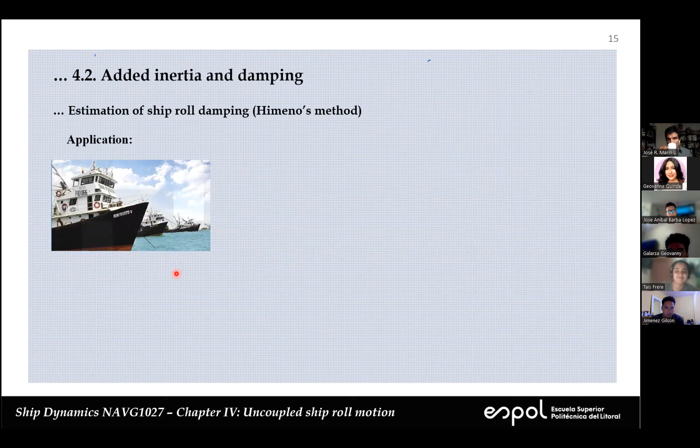So this is the ship. Can you read the name, Miss Frere? Don Fausto 5. So these are the lines of the ship. It's a ship that captures sardine, and we had this model from 2 or 3 years before. We were trying to analyze the possibility of installing a bow bulb. We were not successful; we didn't get any specific improvement. But anyway, we had this model, so this is the one that we used.

As you can see here, it has 2 chines. You see that the keel is not horizontal, typical of a fishing vessel. This is a big space for the propeller. These are the main characteristics. The model was 2 meters long. Some years ago, we decided that our model should be at least 2 meters long. If you have a smaller model, there are some strange influences, and it's difficult to do any analysis.

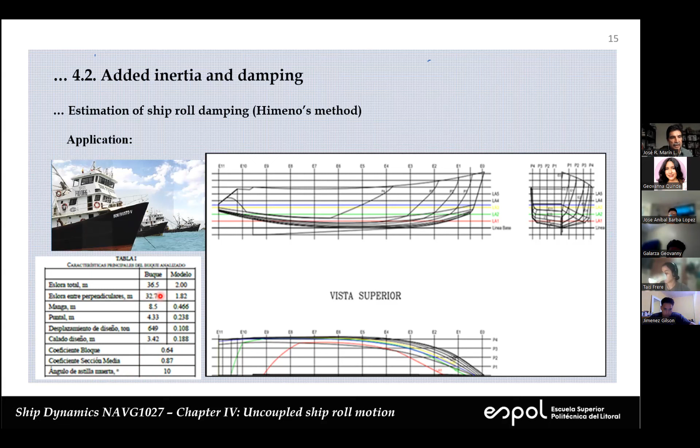And you see that the block coefficient, sectional coefficient, and deadrise angle are the same, because those are basically non-dimensional by nature. All the others we extrapolate. So that was our model. And then first, no velocity. So we employed a pool in the aquaculture area.

So they allow us to do this test. So we placed our model, 2 meters long, like this, and we make it oscillate, and we record the oscillation. And with the decrement, we were able to calculate many parameters.

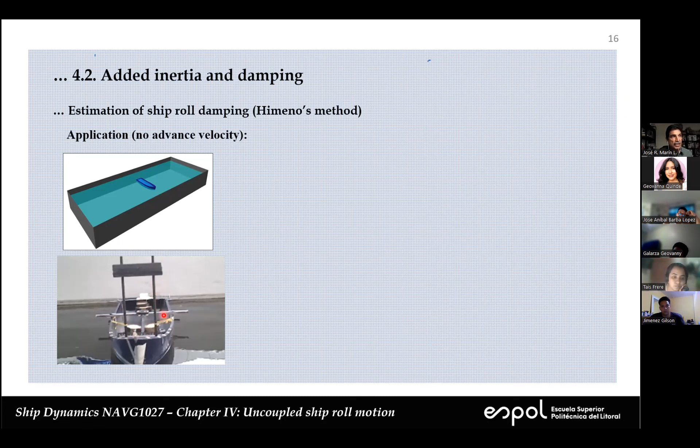We use this device that maybe you recognize from the lab. So putting this up and down, we could change the GM, and changing the GM changes the frequency of oscillation. So we could do tests changing the frequency of oscillation, and we could see the influence of that parameter on the damping coefficient. And you see here there is a small weight because before the test, we did some inclining experiment to determine the GM. So we could change the weight, we could change the GM for every test.

These are the conditions that we analyzed. We did returning to port, departing from port, and the loaded condition. This is the mean draft. In this case, we have the larger displacement, and the idea was to increase. You see from here to there, an increase of 2 centimeters in mean draft. And here this is the range of application of the formulation. Let me go back just a second, please.

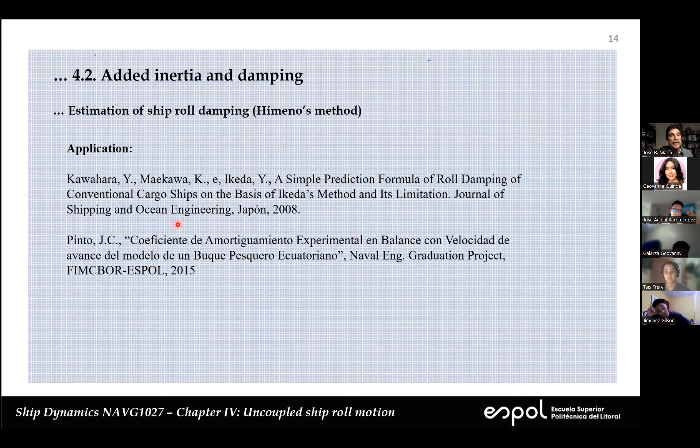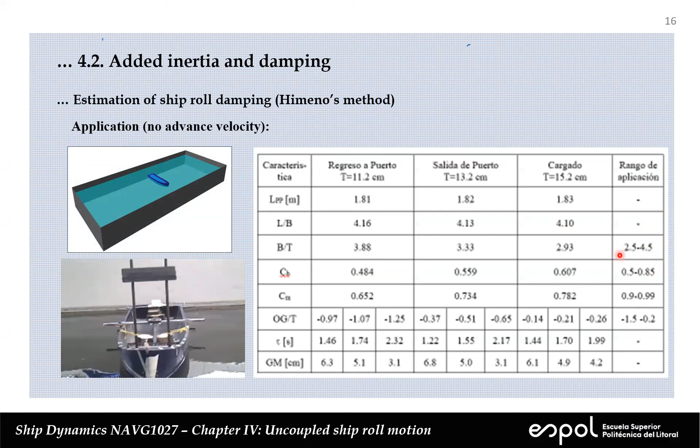We were trying to apply this formulation for conventional cargo ships to a fishing vessel. So the problem was that we knew that we couldn't do it directly, so we have to be careful. We noticed that this is the range of application. So at least for B over T, we are fine. This condition, CB, is the applicable region. And here, in the three conditions, it's not applicable.

Right? Because usually cargo ships have no dead rise, right? So it's basically a rectangle. In the case of the fishing vessel, we have a dead rise angle, and that reduces the sectional coefficient. So in this case, the third condition gets to 0.8 basically. So it's the closest to the range of application of this formulation.

And then, as we said, with this device, we changed the position of the centroid. So we use 3 positions of the centroid for each loading condition. And from that point, we could do the tests and, through the logarithmic decrement, calculate the damping coefficient. Down here, you see the GM corresponding to these 3 conditions.

Remember the minimum GM value for a general ship? Professor Zambrano, do you remember the minimum GM value for a general ship? 0.2. No. Manrique, do you remember the common value that we have to have in our memory for the GM? I'm not sure, but I think it's 0.15. Yes, that's the value. So in this case, in none of them, this is centimeters, so this is 0.06. So all of these are below the minimum required. But anyway, we were able to complete the tests.

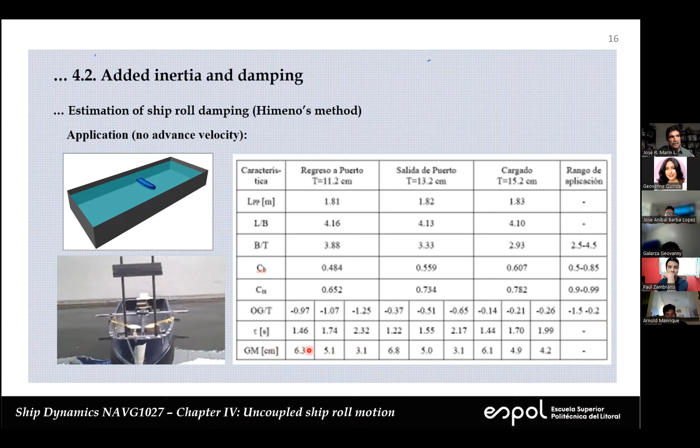The idea here was that we wanted to change the frequency of oscillation. So in this test, since the water was very calm at the beginning, we could control no water coming inside the model, right? So we started with a very large value of roll. So the oscillation was nonlinear. So we were able to measure how this coefficient changes with the amplitude of the oscillation. And this is what you're going to see here.

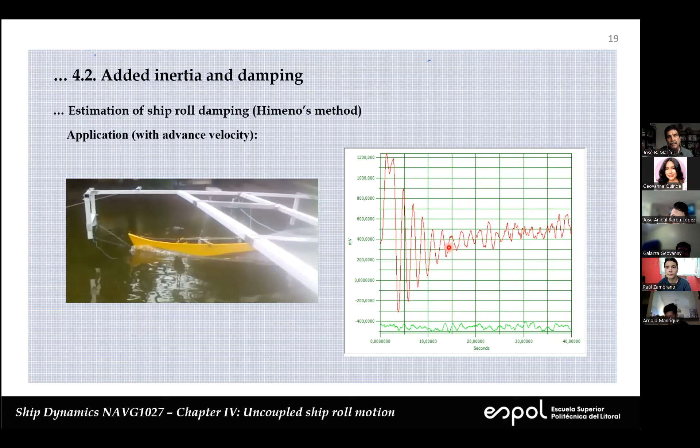Okay, and here we have the results. In this case, we were in the middle of the lake, so we were not feeling safe about the model. So that's why we wanted to include only a small initial amplitude and let it oscillate. Because with the motion, some waves are generated, and we had some problems with water coming into the model. So we just started with a small motion, and that's why we only calculated B1. So that's assuming that the damping was constant, okay? And again, we were able to calculate the virtual radius with respect to the beam, okay?

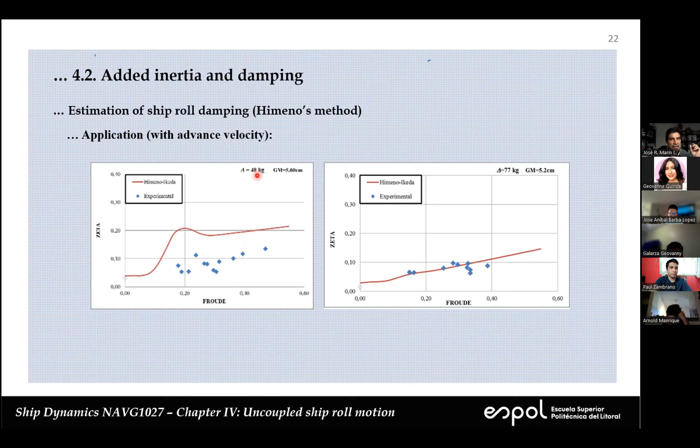Here we have the results. This is zeta. Remember the zeta coefficient, non-dimensional coefficient. And this is the loading condition with 48 kilograms. Let me go back. Okay, 48 kilograms, it's condition 1. And we said, let me go back one more, that with condition 1, the midship section coefficient was 0.65, which is very far away from the applicable region for this formulation. Okay, what happens with the other? This is condition 3, which is very close to the applicable region. And you see that our experimental data are in the range of application of the results.

So when we are away, condition 1, we can say that it's very dangerous to apply this formulation to estimate the damping coefficient, because we are far away from the applicability. When we are close to the range of application, we're not inside, because the minimum CM should be 0.9, but we were with 0.8, wasn't that far away. And you see that in that case, there is a very good relationship between our results and the Himeno-Ikeda method. Okay. You also see here just a slight increase.

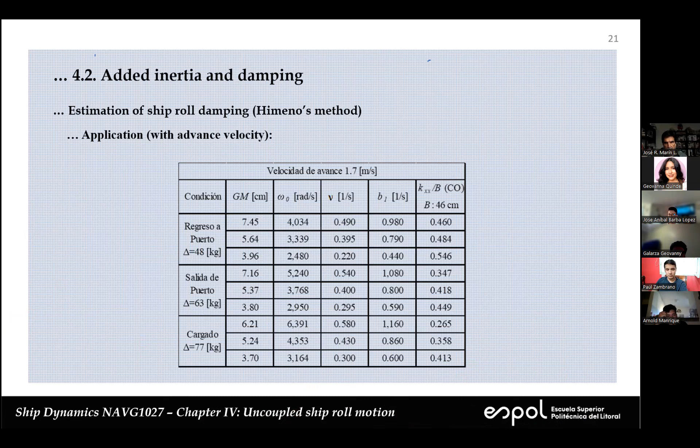Okay. Any questions, people? Any questions about this process? No. Okay. The R squared, what is the minimal value? Because in the table I can see 0.68. You mean here? Yeah. Well, the R squared here was how good is the fit. What we did here, more or less, is the following, okay? We had a record. Okay, so we have a record. And so on. Okay, so we take this value and this value, and we can calculate the logarithmic decrement, right?

And we have this average amplitude. So here, we have this average value. So we plot it here. And with the relation between these two, remember, sigma is the log of x1 over x2. With this, we can take a zeta. And here, basically, we have that value. And then we take this and that. So we have a smaller amplitude and a different ratio. And we were trying to relate these results with these formulas, okay?

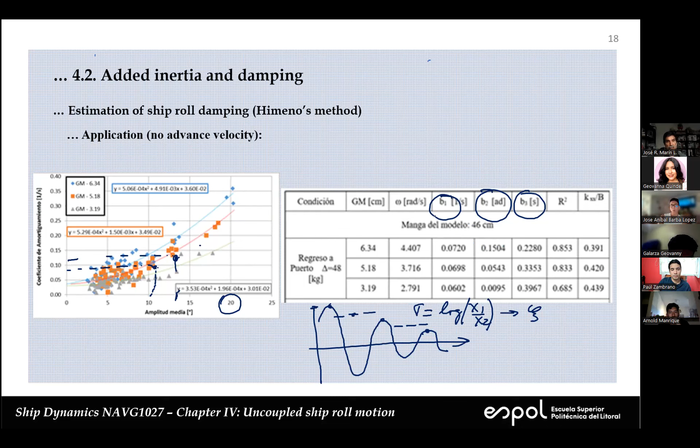Okay, people, for the next assignment, as I said before, I want you to use the formulation from Bhattacharyya, but it's not the original, okay? In Bhattacharyya's book there is a reference, so I want you to look for the source of this reference in Bhattacharyya's, and what we're going to do is this.

In the lab, we have a small model. It has one single chine. It's like that. So you're going to use this for your calculations. In this case, I think it's about 45 centimeters long. I will put the dimensions. And the idea is that you calculate all the parameters. Here we can use a weight, so we can move it and measure the heel angle. With this, you can calculate the GM.

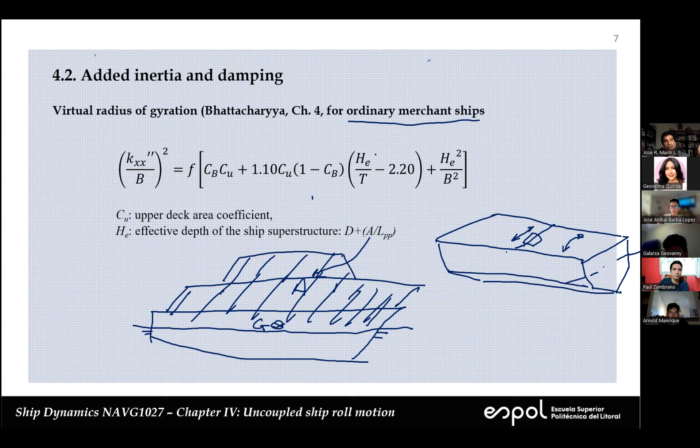We can also calculate the wave damping coefficient, and I want you to use this formulation by Himeno. With this, you have to use Himeno's program. I can give it to you. I'm not going to ask you to implement the program; the program is already done, so you have to use it. You have to prepare a data file similar to this one here.

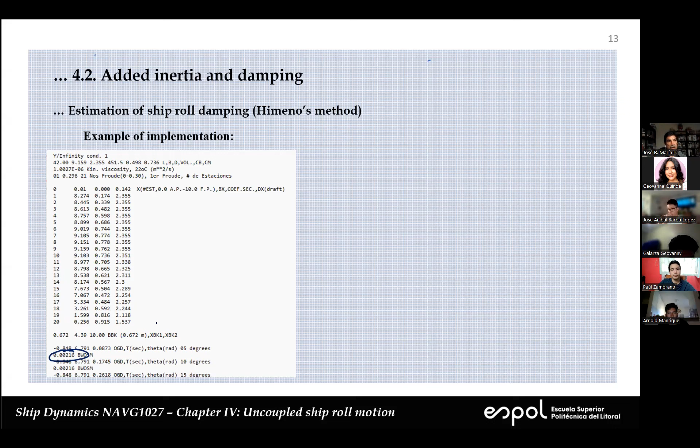Since in this case we have a constant section model, basically you need only 3 stations. It's constant, right? We're going to make it float with no trim to avoid any problems. But we need this: that's the damping coefficient because of the generation of waves. That's what you have to calculate, and for that I want you to use this formulation. So I'm going to give you this work by Himeno. You have to see what's the meaning of each one of these parameters.

Since we are receiving waves from the side, the velocity is going to be 0, so we are not going to be able to check this value. Once you calculate this, you can use the same parameter to calculate for your ship. That's due in 4 weeks. On Tuesday, I will explain how to calculate the excitation in an extremely simple way. So you have virtual mass, GM, damping, excitation. You should be able to calculate the response, and then compare with the experimental results.

I'm going to continue with the evaluation of your problem, and hopefully tomorrow I will be able to give you some feedback. Any problem with coming to the university next Thursday before we break? Who would be able to come next Thursday to the university to do the tests? Would you please raise your hand? Okay, we have at least one person.